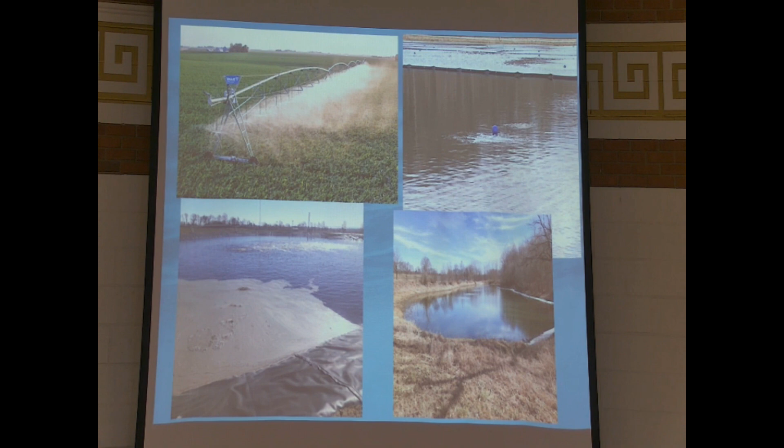Next one - that's just some pictures to show three examples of lagoons. So they're very simple, they're really just ponds. Okay, you can forward.

So just to give an idea of the physical characteristics of these, the design flow is going to be 27,000 gallons per day, which is a pretty low flow rate. That equates to about 150 gallons per resident in a residential home. So that's the design flow rate.

The detention time for treatment is 60 days, and that goes through 2 treatment lagoons, so each treatment lagoon has 30 days of detention. That's how you get your treatment. With the long detention, you get breakdown of the organics, and it just naturally treats the water without having to introduce a lot of mechanical equipment and other...

What would you say, Steve? Without mechanical equipment. Thank you.

As I mentioned, storage for the irrigation is for 90 days. These lagoons are relatively small. The 2 treatment lagoons are about half an acre each, and the storage lagoon is about 1 acre. The depth is 10 feet, and the berm will come up 3 feet above the water level.

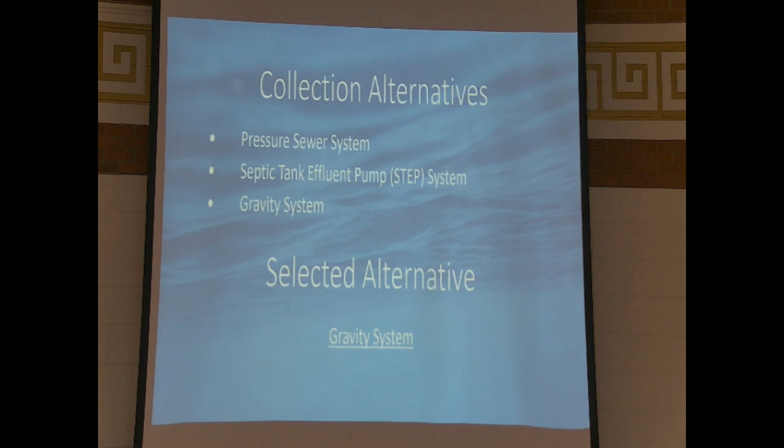Septic tank effluent is a little different system. Each house would have a septic tank, and most likely it would have to be a new one unless there was documentation that the house being served had an adequate, properly sized septic tank. With a septic tank effluent system, the waste from your house goes through the septic tank, and the solids remain just like they do now with an operating septic system. Then what's called the gray water, or the effluent, gets pumped out into small diameter pipelines, ultimately to the treatment plant. So at the treatment plant, you're treating gray water instead of the full wastewater that has all the solids and other organic matter in it. It's a medium cost, a little more costly than the pressure sewer system, but a little less costly than the gravity sewer system. It has higher operating costs because we've got pumps at each septic tank that have to pump this flow out, and we still have to plan for the fact that septic tanks have to be pumped routinely, usually on a 3 to 4 year cycle to keep a healthy, well-operating septic system. When you add those costs up, it's a little higher cost than what was determined to be the lowest cost overall when we take into account capital costs and operating costs, which is the gravity sewer system. I'll talk about that a little more in the next slide, please.

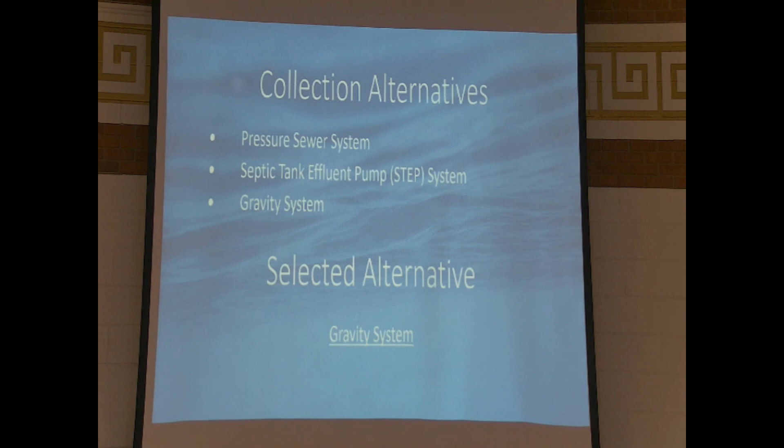Lowest operating costs - it's the absolute lowest in operating costs. What I mean by that is the flow coming out of your house flows down a gravity pipe into the mainline sewer out in the road. For each community, all that flow is transported to a single pump station. The larger pump station will have anywhere from 7.5 to maybe 15 horsepower motors, just 2 of them, but it's only one station. So there's no energy costs other than running those pumps at that pump station, since all the flow is coming down by gravity into that system.

There's a couple of low-lying areas that might need a special ejector pump, and we're still evaluating those right now. It's a balance between how deep we put the gravity sewer in to serve every single house, versus raising it up 3 or 4 feet to serve 95% of the houses and require a few of them to have ejector pumps. That's the cost scenario we're going through right now.

The biggest cost driver in the gravity sewer is how deep it's going to be in the ground. Imagine if you're digging a trench only 5 to 8 feet deep, which is the desired depth, versus going over 20 feet deep - that requires a lot bigger machine. It creates wider asphalt repair requirements and those type of things. So the real balance with the gravity sewer system is to find the routes and alignments that keep our sewer as shallow as possible.

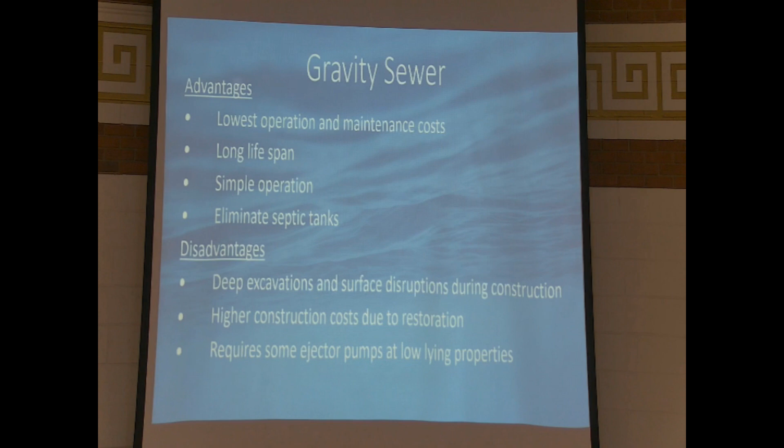Disadvantages include the deeper excavations and surface disruptions during construction. I'm not going to lie, it'll be kind of messy during construction. But when it's all done, streets will be repaved, driveways restored, and any disturbance to the side yards - right along the edge of the road, if there's grasses, that type of thing - will all be restored and replaced with the project.

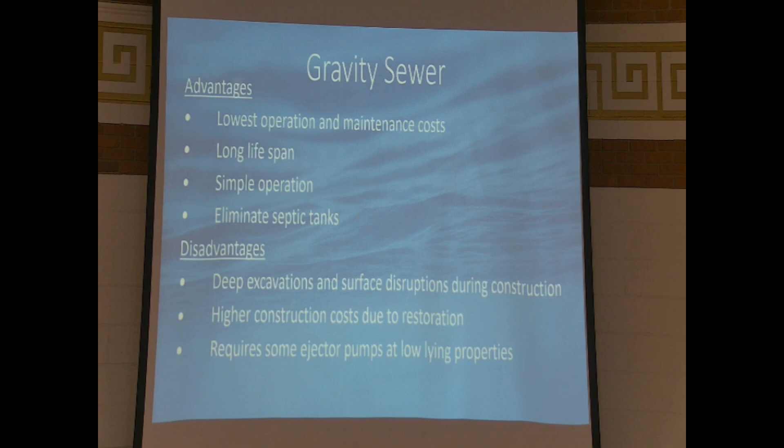You will also have these manholes throughout the gravity sewer system, primarily at the intersections. Whenever I have two gravity sewer lines coming together and maybe one coming out, that's done in what's called a concrete manhole. You've all driven over them in Lafayette and Delphi, anywhere they have a big municipal sewer system - you see those manhole lids in the street. At the grade surface, they're 2-foot diameter, and they're installed to be flush with the existing pavement, so they're not a hindrance to snowplows and those type of things in the wintertime.

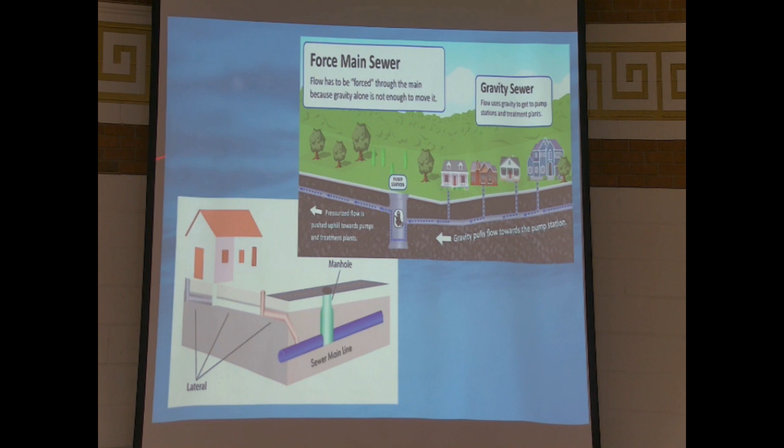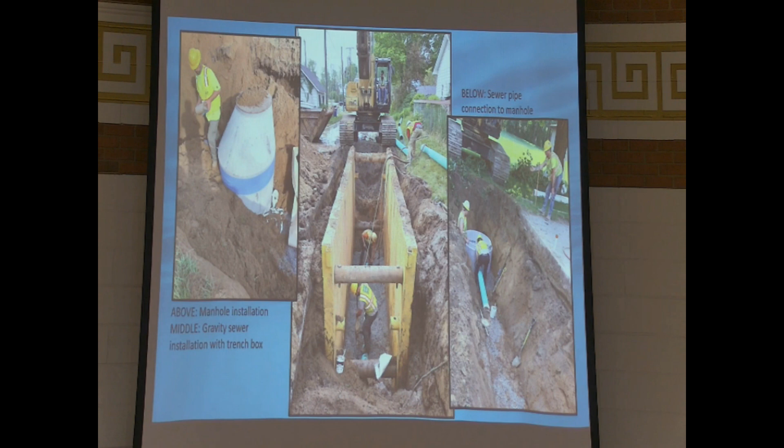Then there's going to be a force main. In Colburn, the proposed pump station is planned for the south end of the community on Church Street. If you know where Church Street comes down south and turns around the curve, we're planning to put it just off the edge of the road, through that curve area. It'll be protected by a guardrail system we've already discussed with the county highway department, and it'll be located on land maintained by county highway.

From the pump station in Buck Creek, the force main will be a 3-inch diameter pipe. All the flow goes into the pump station through an 8-inch diameter gravity sewer, but that 8-inch won't ever be flowing full. An 8-inch gravity sewer at minimum slope can actually handle about 400 homes - we have about 75 in Buck Creek and about 65 in Colburn. It's just what the state requires as the minimum size for a gravity sewer, so that down the road, if you ever need to clean the line, it's large enough that you can get a pig through there to flush it out or drag it out if needed.

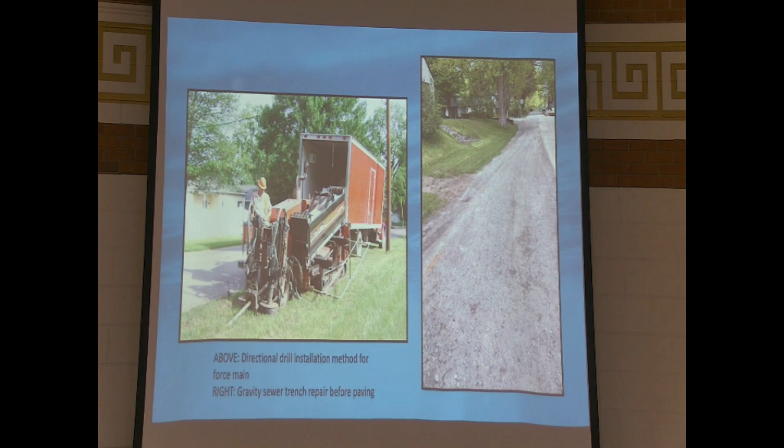Just a few small details here. Buck Creek has approximately 75 single-family connections, 9 small commercial businesses, a couple churches, post office, grain elevator, a couple small businesses, and the fire department. I didn't mention the community center, but it's up there as well and will be part of this project. Colburn has approximately 65 connections—these are plus or minus 1 or 2, as we're still finalizing those counts—and there's one small church there as well.

Just some general statistics here. This proposed gravity sewer system, both in Buck Creek and Colburn, to serve those homes, is about 19,600 feet. We have about 25,000 feet of 3-inch force main running from Buck Creek to Colburn, about 5 miles, plus 6,500 feet of 4-inch force main running from Colburn up to the wastewater treatment plant north of Colburn. One of the key drivers making this project so economical is that we only require 2 pump stations—one in Buck Creek pumping a max rate of about 50 gallons per minute, and one in Colburn with a max rate of about 90 gallons per minute. We can show more details after the meeting if you're interested in seeing where things are located.

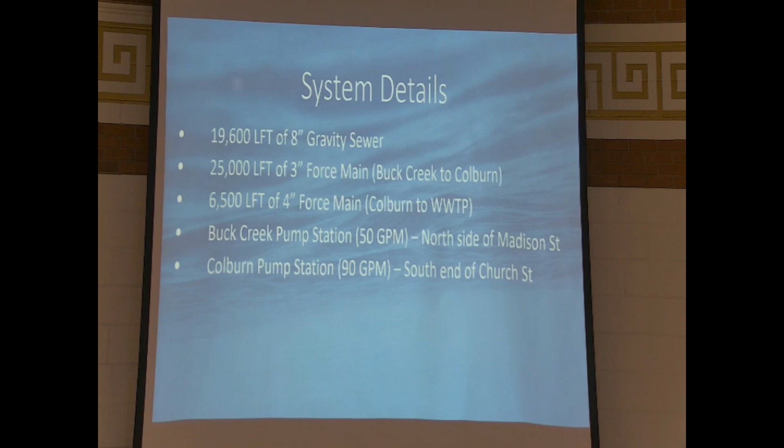Approximate project schedule—always subject to change—but we're working through finalizing design in October, submitting construction permits in October, receiving bids perhaps in November. This is a best-case schedule: awarding the project perhaps in December, beginning construction in March of 2025. While we think most of it can be completed in one construction season, there might be a few things that have to wait till the following spring, so we're saying about May of 2026. That's the ballpark of where we intend these projects to go.

We'll probably have several different contractors—one doing the treatment plant, one doing the gravity system in Buck Creek, one doing the gravity system in Colburn; it could be the same contractor if they got the low bid for both. Then probably a third or fourth contractor building the force main between Buck Creek and Colburn. That's just a general layout of how we're thinking that might happen.

Steve is our expert on the collection system, so let me ask him to address your question and give the details. And maybe I misunderstood, but every home that's being served in Buck Creek or Colburn is being served by the gravity sewer.

So the house will connect to the gravity sewer. That whole gravity network flows through a series of pipes down to the one pump station in Buck Creek or the one pump station in Colburn. The only force main, as John stated, is between those two pump stations, but there aren't any connections tied to those force mains.

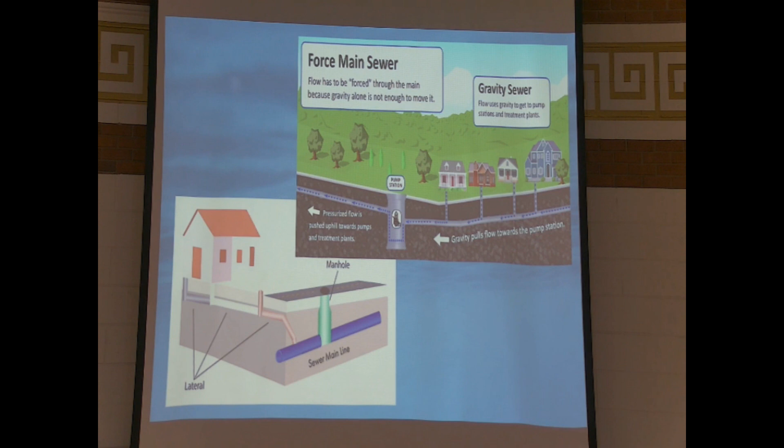There's a force main running from Buck Creek pump station to Colburn pump station, dumps into that. Then it gets picked up and pumped from Colburn pump station up north to the wastewater treatment plant. So every house is going to be served by a gravity sewer, either in their front yard side, which would be in the street, or there's a few locations where it's in the backyard side, perhaps in an existing alley. Does that help answer the question?

Okay. I'm Hank Brown. I want to know, when they come down past our house, can we tell them where we want that hookup to be?

Within reason. Well, I don't want it to be on the other side of my house, I need it on this side. Much of the collection system has been oriented... will they put T's in all this so we can, or a sweeping 45?

Exactly. Yeah, you'll have a TY connection so that you can bring it in, and along where the gravity system is running in front of your property or behind your property, you can designate where you want that to be. It'll generally be as straight a line from your stub out at the basement as possible in order to minimize your trenching and all.

Yeah, and to avoid trees. That's another good point actually, some people have trees or other concerns there. The installation is going to be sensitive to that and try to avoid any damage or disruption to those natural features. So when they come through, all we got to do is tell them whereabouts I need it?

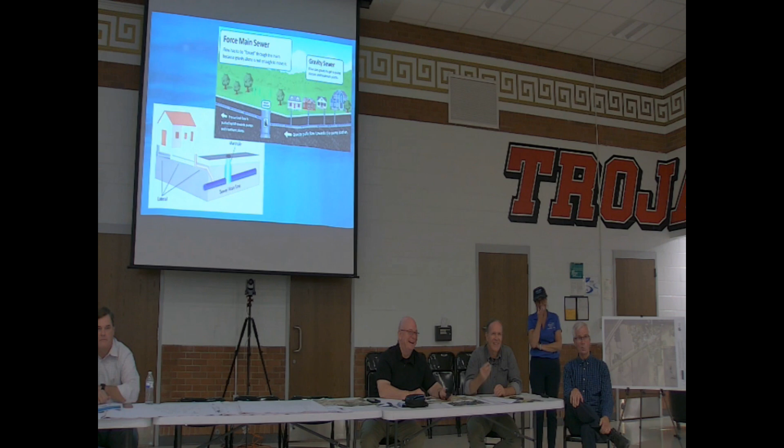I'm Bob Shepard from Buck Creek. Just one easy question here. Last meeting we talked about, or you talked about, having a field for these lagoons, for this lagoon. Have you purchased that, or have we gotten that yet, acquired that? We have a draft. We've extended a draft purchase offer to the owner of the property. Okay, but nothing's finalized yet.